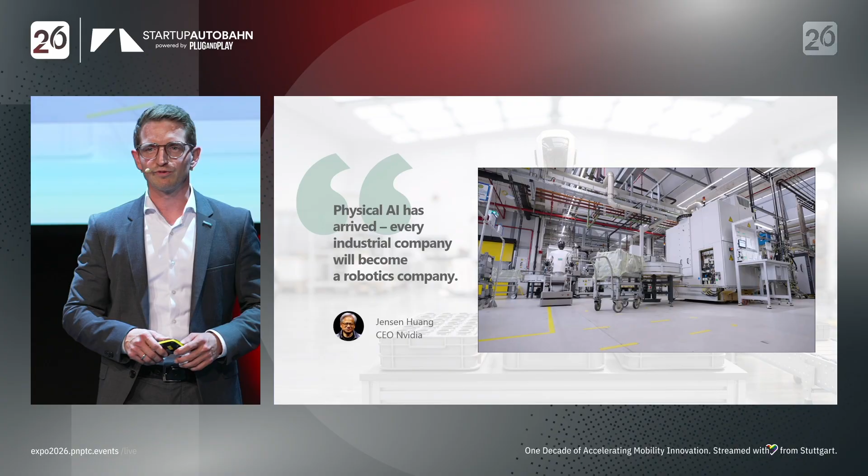Before we dive deeper into the next 10 minutes - 5 minutes for Schaeffler, 5 minutes for Humanoid - we'll share our joint ambitions as well as our individual visions for physical AI and humanoid deployments, a short impression footage of a first deployment together with Humanoid, and of course the star of the show, the wheeled Alpha from Humanoid.

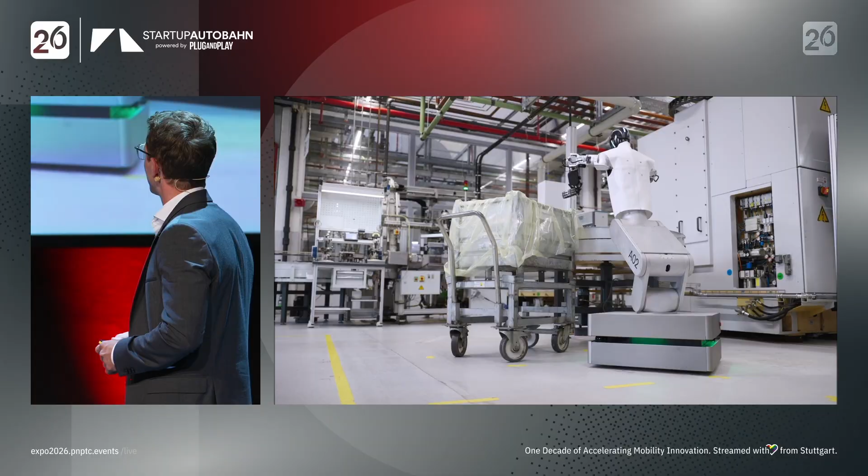And the pictures speak for themselves. This is an automation task which we have many of at Schaeffler - it's unloading, it's bin picking of unsorted parts, rings in this case, for further processing, whether that comes to automation, assembly lines, or processing in terms of grinding and honing.

Of course, there's no good presentation without a short company introduction - we already had Schaeffler on stage, and there will also be a colleague of mine speaking after me. I'll try to keep it very crisp, but it's important for me to share that we understand ourselves as the leading motion technology company. Schaeffler has, for decades - around 80 years - been driving groundbreaking innovations in motion, making motion more efficient, more reliable, sustainable, but also intelligent over the entire life cycle.

We understand ourselves as the reliable partner when it comes to motion technology, and that's also why we structured our product portfolio at Schaeffler - you might know it's quite a broad one into different motion areas. Just to name a few: drive motion, transmit motion, control motion, always with a specific relation of the product to motion. Due to time constraints, and I can already feel the pressure on my neck, I'll try to limit it to that, and would like to invite you to approach me after my short presentation if the motion technology area is of interest for you.

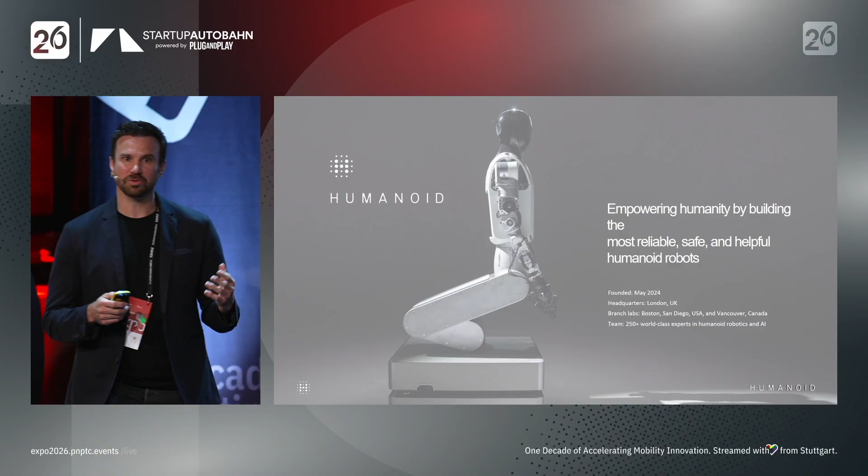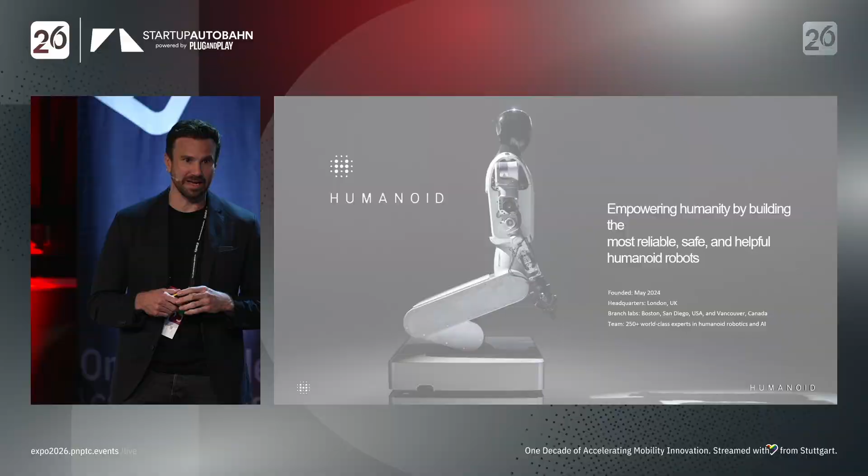So, for the ones who have not been here last year, who are we? We are Humanoid, a humanoid robotics company, as the name suggests. 2 years young or old, born in the AI age, with an incredible track record, already over 250 people and lots of offices around the world to grab the best AI talent in the Bay Area, for example, in Boston, because we onboarded a lot of people from Boston Dynamics.

To make up a bit for the time, let me show you our focus. So you've seen the wheeled platform. We do not believe in bipedals for now, particularly not in the industrial space. And we are very, very industrial focused. Clients, customers, partners like Schaeffler or other logistics, supply chain, manufacturing, automotive customers, they are our stakeholders.

This is our product, the Alpha prototype. Until now, in around 6 to 8 weeks, we come out with the next version, the beta. The Alpha has already superhuman capabilities, 2.20 meters high, a bit faster than a human being, 15 kilograms of payload. The next beta is obviously faster, even stronger when it comes to payload. It also has battery swaps, so there's a clear improvement, as you can see here.

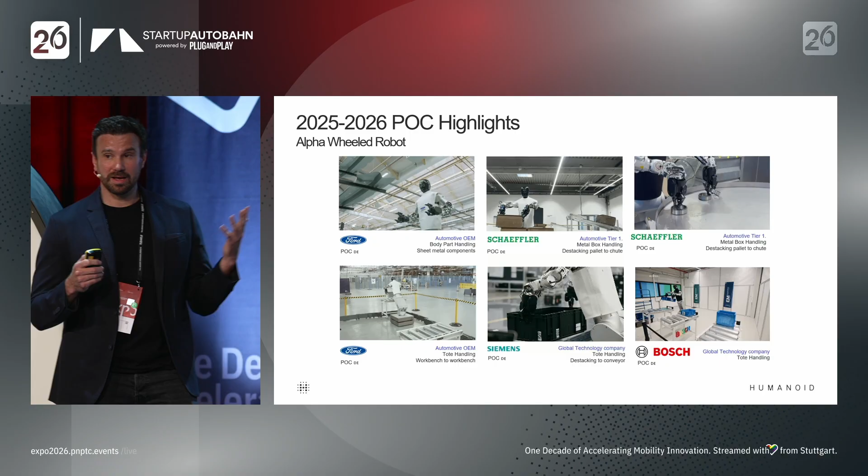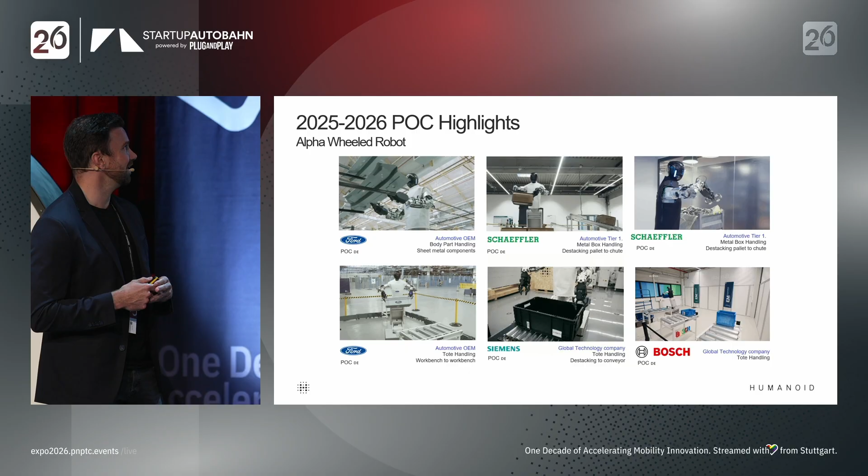What have we done? I mentioned industrial focus. We've done a lot with Fortune 500 clients already. Schaeffler, the first one, where we met actually pretty much a year ago, exactly here at a Startup Autobahn event. Also, we met with Ford here, so it's really a great venue to bring companies together with startups and scale-ups.

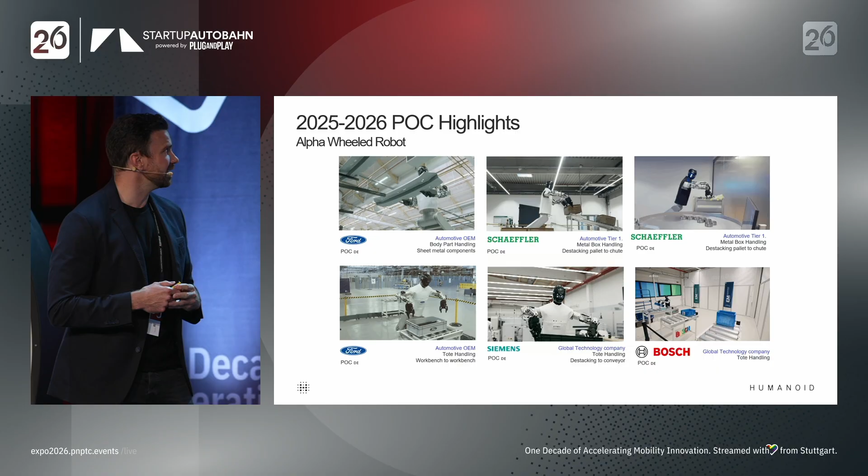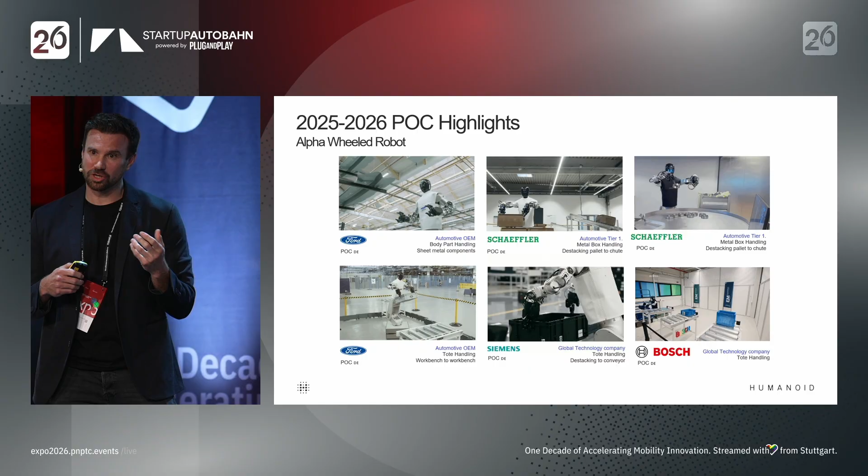We have done quite some use cases in the logistics space. We have done body parts handling, even in automotive. We have lately done a really interesting use case with Bosch as well, with our integration layer for the first time.

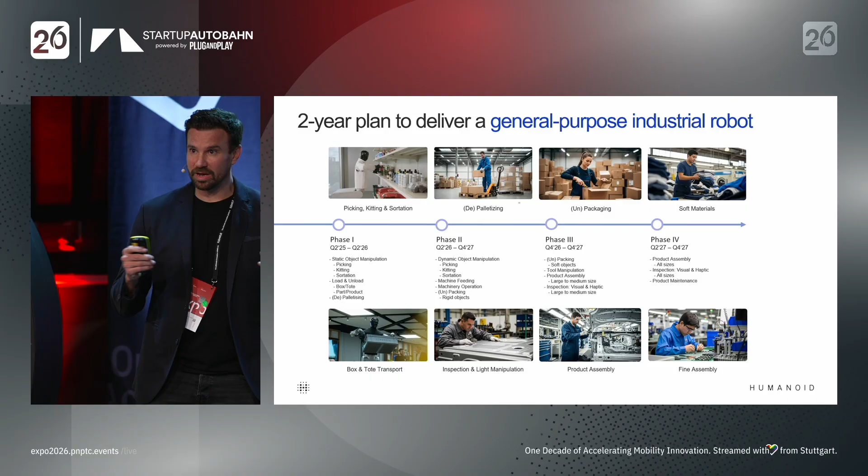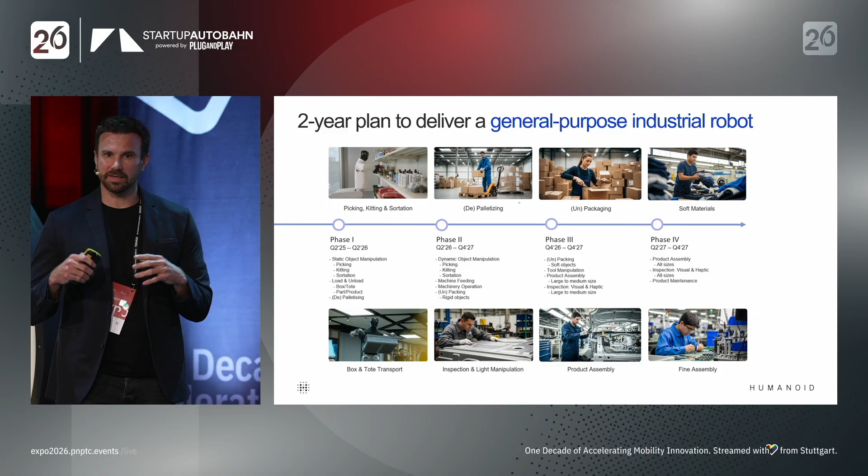The robot scanned the QR code, and the WMS told the robot what to do with the box, for example. And the signature use case, obviously, with Schaeffler. How do we see the way forward? What is our roadmap? Let me simplify this graphic: on the left-hand side, a very simple task like big object manipulation, like picking up a box. On the right-hand side, the very dexterous tasks, soft objects, small objects, down to computer chips, for example.

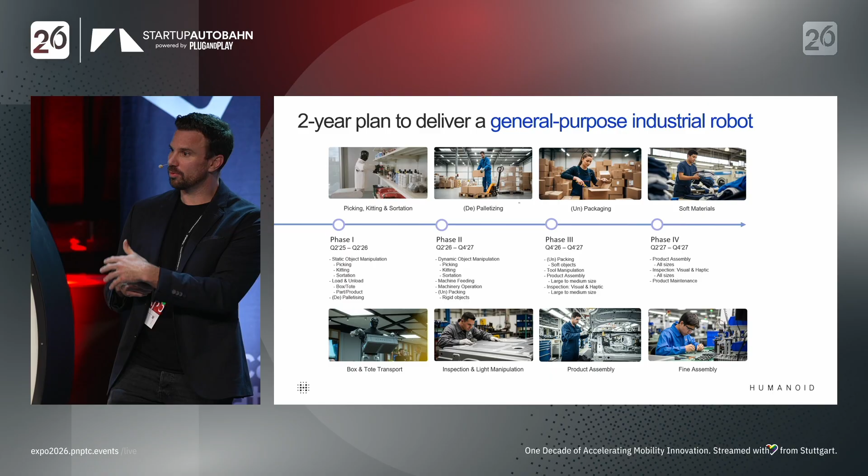We are right now between phase 1 and 2, so kitting, picking, sortation, machine feeding, machine operation. That is something we are doing already today, as you have seen in the other videos.

So I made a bit up for the time, and maybe now handing over — we want to share our roadmap with the audience. Right now? Okay, let's do it right now.

One more second. So of course, what we share with you — that's why we're here on stage, and that's what we're very proud of. We have developed a roadmap which has some history, and that was before my time. So, Jochen, if you can share with the audience.

Definitely, with pleasure. I just celebrated yesterday my first year anniversary with the company, and that was also the moment when we met actually here around the Startup Autobahn event, as mentioned during the presentation already, and had the first introductions, site visits, and use case explorations, etc.

We are really proud that only half a year later, we had the pleasure to announce our strategic partnership together with Schaeffler. We met the owner, Mr. Schaeffler, we met the CEO, the board, and we have been part of CES. There was a great alignment already from the beginning, hence we are standing here today. But why don't you take over from here?

Very good. If you can remember the flywheel I introduced, we're working basically on 4 main domains, and that's reflected in the partnership with Humanoid — working on agreements for deployments of the embodiments in our manufacturing facilities, as well as being a strategic component supplier for Humanoid.